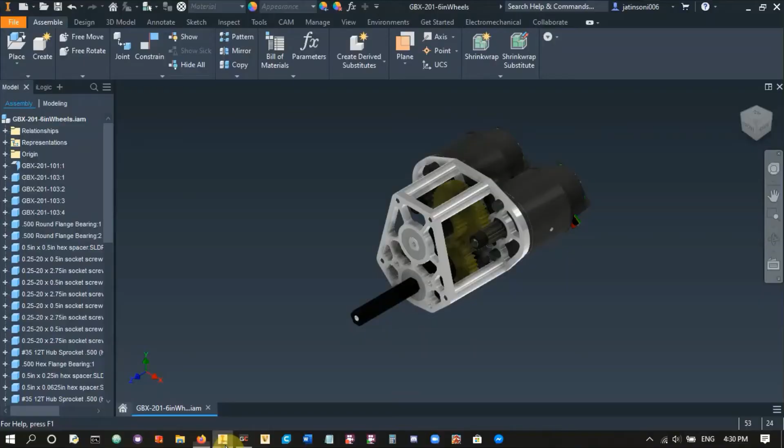Alright, so in this video we'll be starting our drivetrain gearbox. So if you remember in the first video, we covered how gearboxes work, what motors are, what kind of motors there are, how gears work, and how it all comes together into a gearbox, as well as using this JVN calculator over here to configure the gears that you will use, and etc. So today we'll be starting with the gearbox.

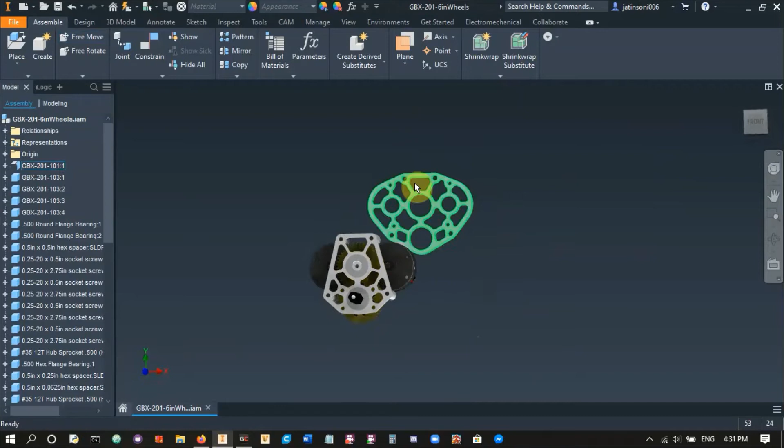And so the first part when you're making a gearbox is making this first plate over here. And so as you can see, where the motors go, where the gears go, all of that is decided by this plate over here. And this is where everything will be attached to. And so this is essentially the first and very most important part of a gearbox. And so that's what we'll be making.

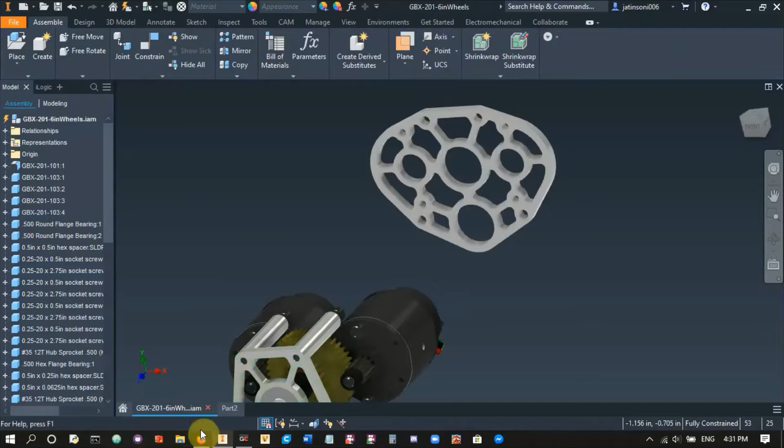So we'll start with the new part. I have a setting which automatically starts a sketch, but for demonstration purposes I'll just start a new sketch. We can start on the XY plane, and so here we are with a new sketch, and we want to create a gearbox. So first step is getting the JVN calculations done, right? So let's say we'll use Falcon 500s, 2 gearboxes in a drivetrain, 2 motors per gearbox, 154 pound weight, and let's say we'll use 4-inch wheels this time, and let's figure out what gears we can use.

Now if you want to know what gears are available, what you can do is hop onto VexPro hex gears, just search that on Google, and you'll see multiple links here. You want to use the 20 dp 1/2 inch hex bore gears. What the 1/2 means is basically the inside of the gears has a 1/2 inch hex cutout, and so we can use a 1/2 inch hex shaft through them.

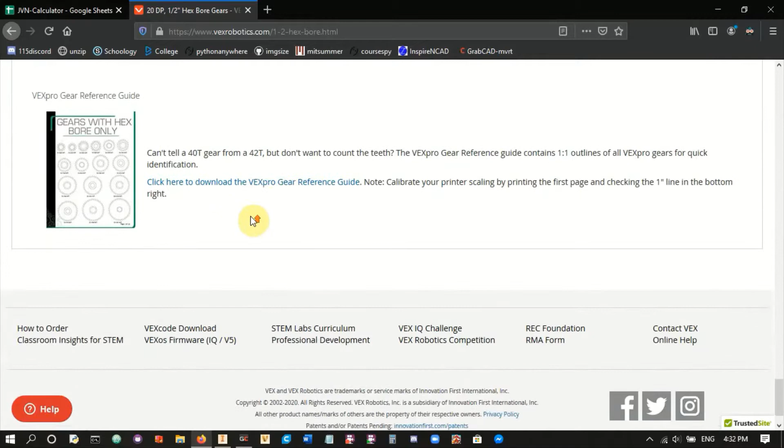And so if you scroll down, you can see all the possible sizes there are. So it starts with 18 and it works in increments of 2, so you have 18, 20, 22, 24, 26, and it keeps on going until you get to 84 teeth, and that's the biggest gear that they sell. And so those are all the possible gears we can use. So that's the gears over here, so 46, 20, 42.

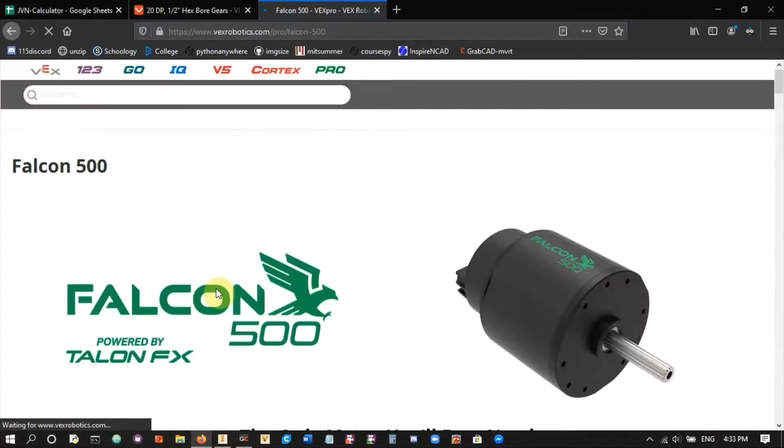Now this gear over here, the small gear that attaches to the motor, those ones are not on this link over here. For that you have to search Falcon 500 motor gears, right? So we'll search that, and if you scroll down to the VexPro link, so this is the Falcon 500 motor page, and we should be able to find the gears here. Scroll down, click on accessories, and here we go, these motor pinions.

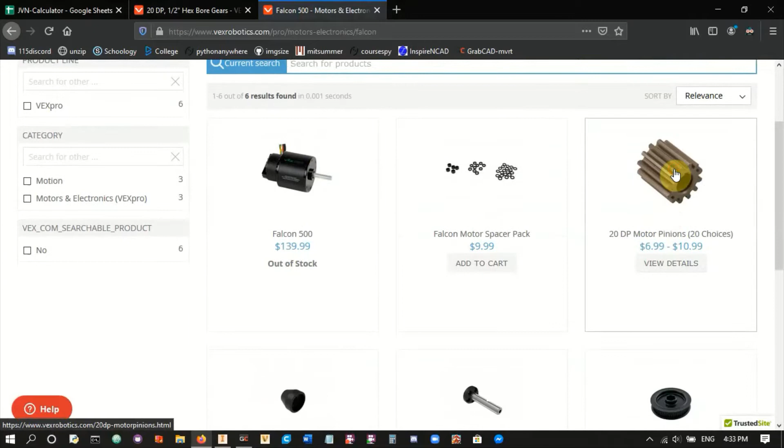So we could have searched for motor pinions, but if you guys see here, it says 20 dp, and over here on these other gears that we use on our hex shafts, it also says 20 dp. So dp stands for diametral pitch, and basically it defines how these teeth are made, and if you have 2 gears that are both the same diametral pitch, they will be able to work together with each other.

And there are also 32 dp gears that are used in FRC, but most commonly you see 20 dp. And the difference there is basically the 20 dp gears tend to be bigger, and so they'll take up a little bit more space, but they also are able to handle a higher load, and that's why you'll see them on drivetrains.

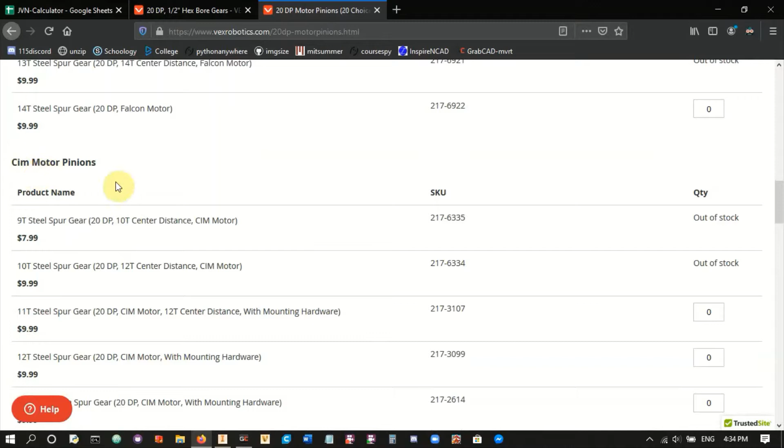So here we go to our motor pinions, and if you scroll down, you can see there's all sorts of options for different motors. So we have 8 teeth gears for the Falcon motor, right? And then we have 9, 10, 11, 12, 13, and 14. And then there's a different set of pinions for the CIM motors, and the CIM gears also work with the NEO motors. So for the CIM motors, you have a smaller list of options, everything from 9 up to 14 teeth.

And then there's pinions for other motors. So for example, the 775 Pro motor, you can also attach pinions to it, but we generally use it with a VersaPlanetary, right? So you have all these gears that can be used. So we can pick here anything from 8 to 14 because we're using the Falcon 500. So let's say we go with 10, so we can change this around.

And then the driven gear, right now we're at 11 feet per second, so that's a little bit slow. And our current draw is 61. So this is a very safe number, but we can go a little bit faster. So maybe let's try 44 teeth. So that looks a little bit better. We have 12 feet per second, and we have 64 amps in current. Let's see if we can go a little bit faster even. So let's try 40 teeth.

So if you reduce these big gears over here, if you reduce their size, you'll get more speed, but less power. If you increase their size, you'll get less speed and more power. The contrary is true over here.

The smaller your driving gear, the more power you'll have. The bigger these are, the higher the speed, but then the lower the power. So you can play around with this when you're deciding your gearbox. Maybe we can try a bigger gear here.

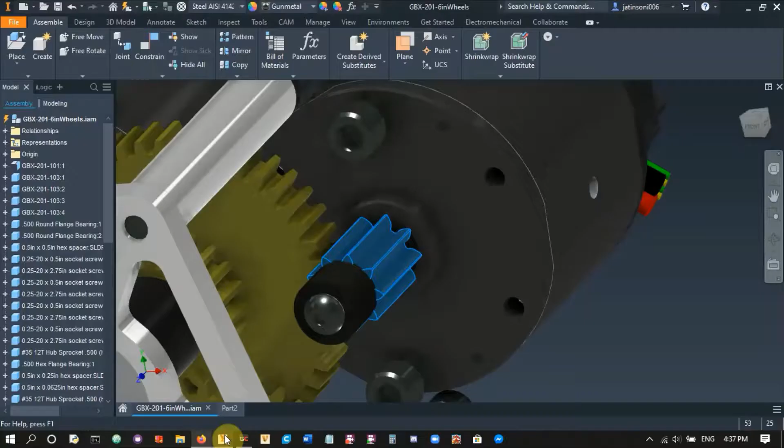So what we can do is just go with these gears here. So we'll use a 9 tooth on the motor, similar to this gearbox, and then we'll have a 44 tooth gear connecting to it, and then a 22, and then a 40. So when we make our sketch here, the first thing we want to do is make these 9 tooth gears. So what we'll do is we'll make 2 circles.

So we'll make a circle here, and we'll make another circle over here. Right, so we have our 2 circles here, and then the next gear in the middle is this 44 tooth. So we'll make a 3rd circle in the middle. That will be the 44 tooth. So these circles here basically represent the gears.

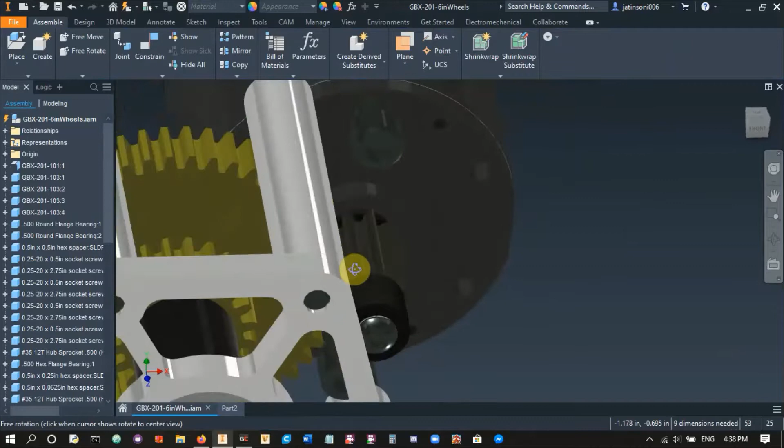Now, what we want to know is how far apart should these circles be from each other so that my gears connect with each other, right? So for that, what we need to get is the pitch diameter of these gears. So if you look closely, these gears mesh with each other, right? As you can see, let me remove this plate here.

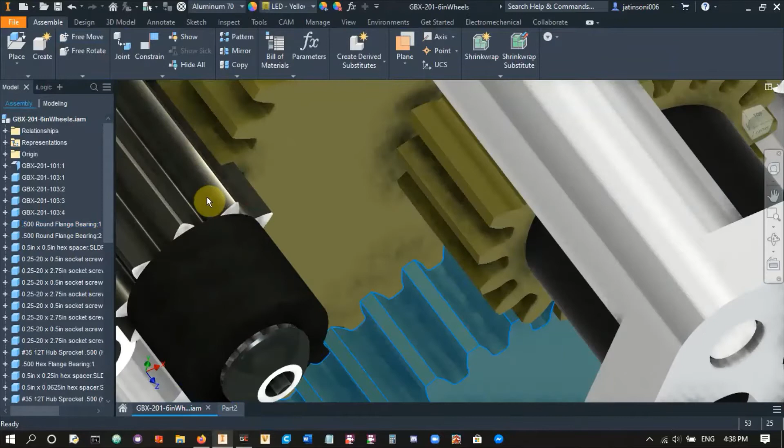If you look carefully, you'll see that the gears actually intertwine with each other, right? The teeth of this gear go a little bit inside of this space over here, and so I can't just use the outside diameter of these gears because then they won't mesh with each other.

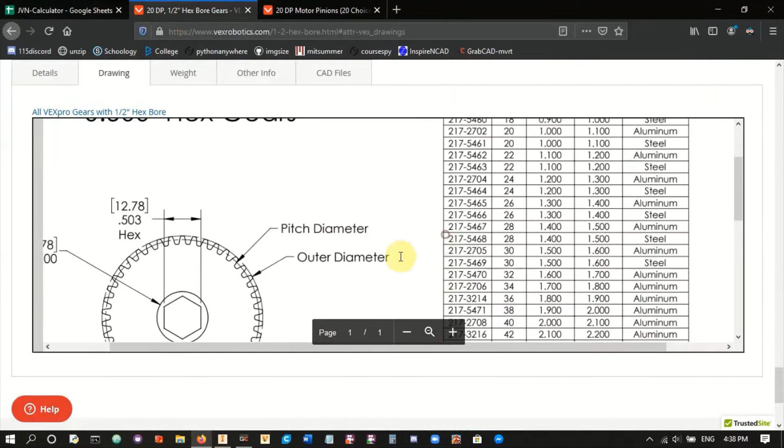So to find the diameter at which they will mesh, what we do is we can head over here and scroll down on this VEX page, and if you click on drawing, you'll see this PDF kind of file here, and if you zoom in over here, you will see that here's the drawing of those gears. So there's the outer diameter of the gear, and there's a pitch diameter.

And so when any 2 gears, if their pitch diameters are touching each other, what it means is that they will mesh with each other. So if I were to make these 2 circles the pitch diameter of my 2 gears, and if I were to connect them, that would mean if I place my gears on them, they will mesh with each other, right?

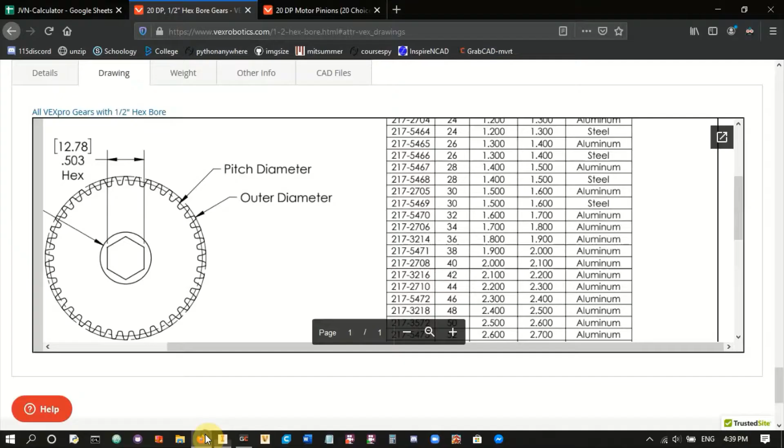So we have a 44 tooth. Yes, we have a 44 tooth here. So if you look here, pitch diameter is this column here. So if we scroll down, 44 tooth, 2.2. So this is in inches. So 2.2 inches is our pitch diameter. So if you go back to our circle, we can add a dimension for 2.2 inches, right?

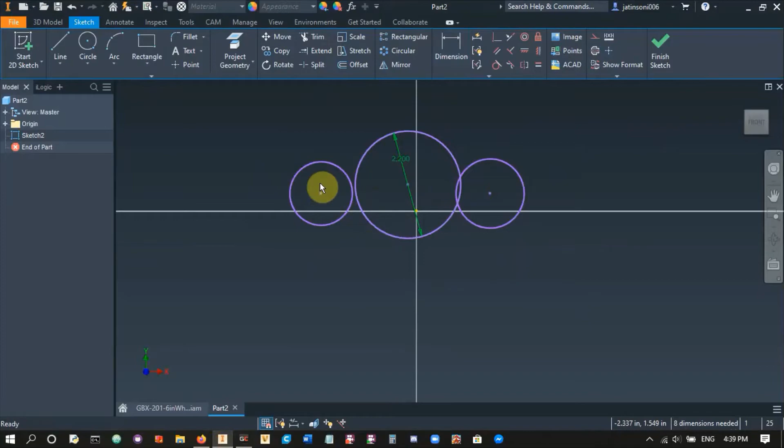And now we want the pitch diameter for this small gear here. So we're using a 9 tooth, and it's a motor pinion, so we have to go on the second website with the motor pinion, and we'll scroll down again, click on drawing, and you can zoom in, and this page is slightly different, but it gives you the tooth count.

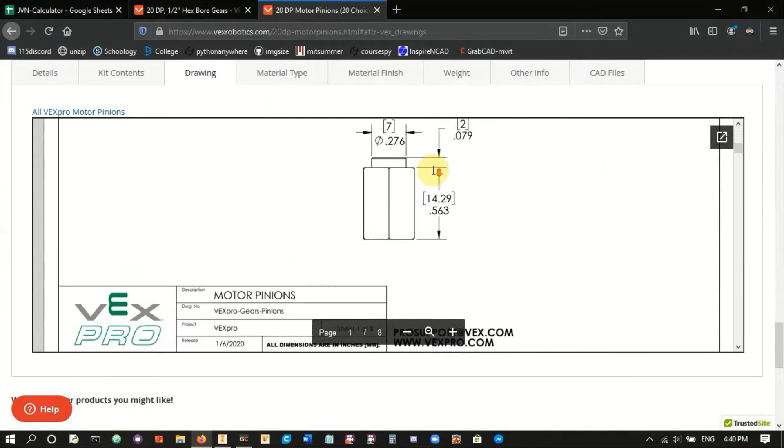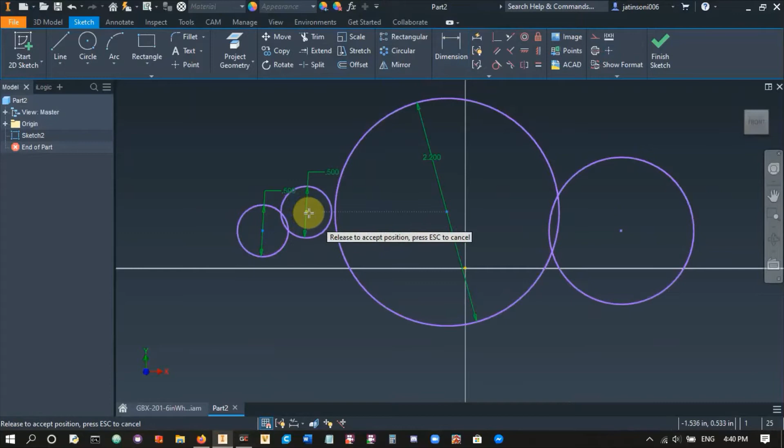So we're using a 9 tooth here, so we have to scroll down, and this is the 9 tooth page, and we're looking for a falcon gear, and so our pitch diameter over here is 0.5 inches. So we'll use that over here. So we'll make this 0.5 inches. And now what this means is if I connect these 2 circles right next to each other, and if I were to place my 2 gears over here, they will mesh with each other perfectly. And that's what we want.

So what I'll do to place them next to each other perfectly is we'll use tangent. What you can do is do tangent on this circle and the second circle, and these two circles are now connected to each other no matter where they go. And this distance between them, if we measure this distance here, 1.35, that's the exact distance we need for these two gears to work with each other. And so that's how you can use the pitch diameters, right?

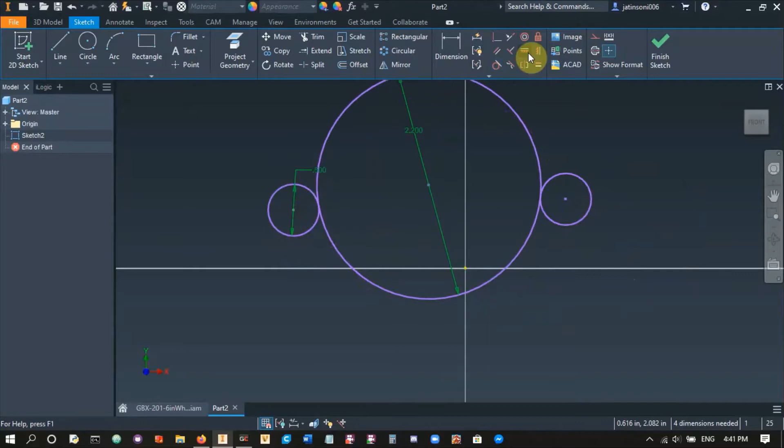And so we have the same thing on this side, so we'll make the smaller circle equal to it, and we also need to make a tangent. So there we go. And then what we can do is have all these gears on the same level, so we can make them horizontally constrained. So the center of this circle should be on the same level as this circle, and the same thing here.

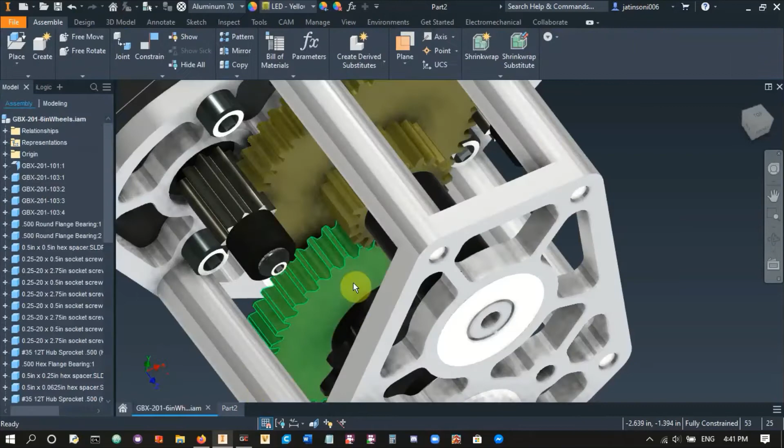And we want this to be symmetric to our origin point. So what we can do is just coincident the middle of this circle to the middle point. And there they are. So now they can't move, it's fully constrained. And so that's my first set of gears. My small gear, big gear over here. Just like how it is in the full CAD over here, right?

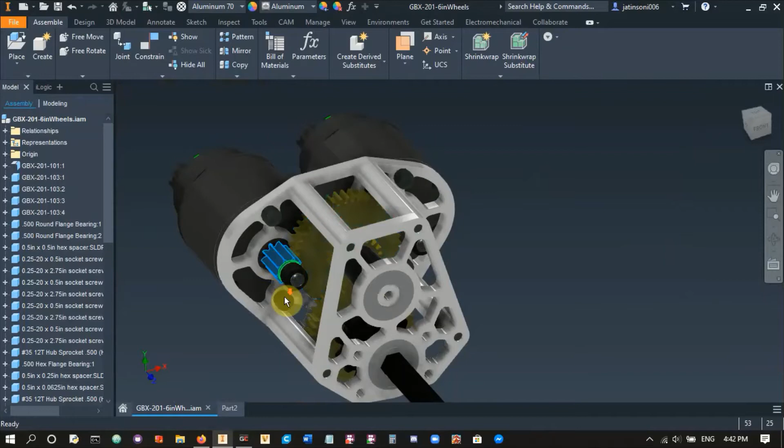Alright, let's move on to our next set of gears. So now we have a 22 tooth gear. Now remember, this 9 tooth gear here is special because it has to go on the motor. The other 3 gears are all of this hex kind, right? Because if you look in our CAD again, these small gears are the only ones that attach to the motor, and the rest of them are on hex shafts.

So now I don't need this motor pinion page and I can close it. And we just need these sizes over here. So we're going for a 22 tooth and a 40 tooth gear. So we go back in our sketch, and we're going to make 2 circles again. So starting from here, this is our small gear, and we'll have a bigger gear over here, right there. And let's give them some sizes.

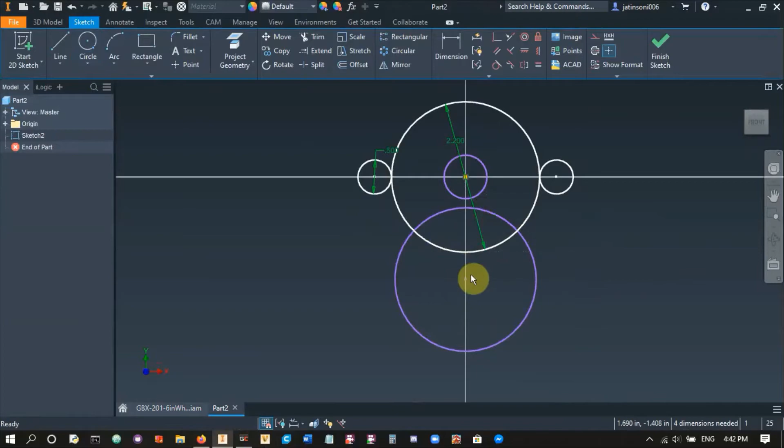So if we go back, we're looking for 22 teeth, and so if we scroll down, 22 teeth, right? And there's 2 of them because there's the aluminum and there's a steel version. Basically, for smaller gears like 18 tooth and anything below that, you want to try to use steel gears because the gears are smaller, they can't take as much load, and aluminum is weaker than steel. So for an 18 tooth, for example, we would generally use steel, but their sizes are the exact same. So we can use the pitch diameter of 1.1.

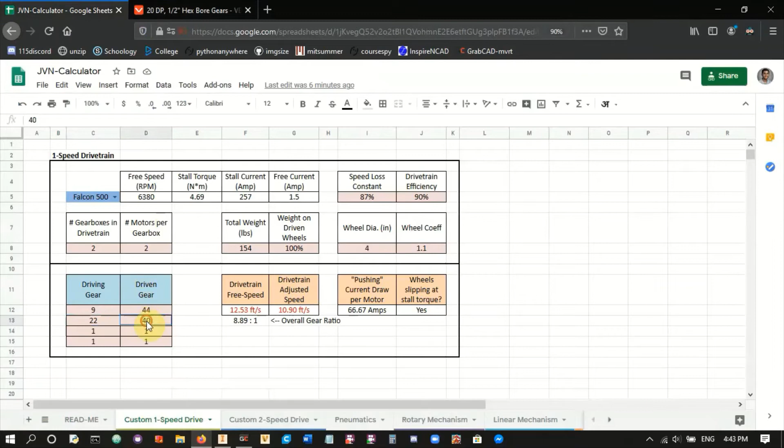So we go here, dimension 1.1 inches, and then let's go back, and our second gear, our final gear here is a 40 tooth gear. So we'll scroll down to 40, and it's 2 inches in pitch diameter. So we'll go back and we'll make this 2 inches. There we go. And so the final step here is to make these 2 tangent, just like we did with the first set of gears. And right now the only problem is this gear can move around side to side. So we'll add a vertical constraint to it so that it remains in our origin point.

And so this right here is a layout of all the gears and how they will mesh with each other, and this will work. And so this is the first part of making a gearbox plate. Now what we can do is make all these construction, and the reason why we need to do that is because even though these are the sizes of the gears, we don't actually need to extrude all these geometries here. What we need to extrude are like bearing holes and things.

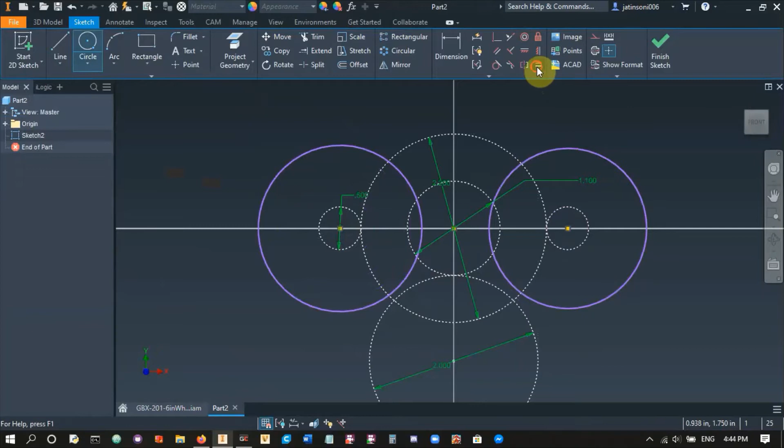So the next part of this sketch would be to model in our motors, because if you look at this first plate over here, it goes around the motors. So we need to know how big our motors are, right? So we'll go in here, we'll make a circle over here and another one over here, and because the 2 motors are the same, we'll make them equal. Right, now we need to know the size.

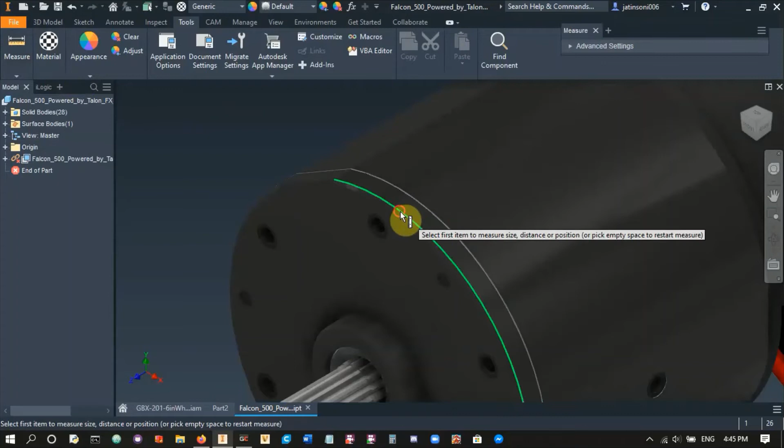So what we can do is go here on our Falcon motor, or you could open it from the parts library. So if you go open, library, motion, motors, Falcon 500. If you open this file, let it open, and if you go under tools, there is a measuring tool. So what we can do is click on measure, and then you can select like this outer circular portion of the motor, and it will tell you, like in this case it tells us the area. If we select just the arc, it will tell us the diameter of the motor. So here it tells us it's about 2.4 inches, right?

So what we can do is we can go in our sketch and we can add a dimension for 2.4 inches. So if you look here, these motors are close to each other. If you look in the assembly, they're also pretty close to each other, right? So this is where making this sketch is really useful, because if my gears were super small, my motors would be colliding with each other, which is not something you want, because that's not possible, right? You can't have these two motors going inside each other.

So this is another place where making this sketch is really useful. Right, so the next thing that we need over here - all these hex shafts need bearings on them, because otherwise how will they spin? So we need to make bearing holes.

So what we'll do is take a circle and make two circles, one here, one over here. We'll make them equal to each other because they're both bearings, and we'll give it a dimension. So bearing holes again are 1.125 inches.

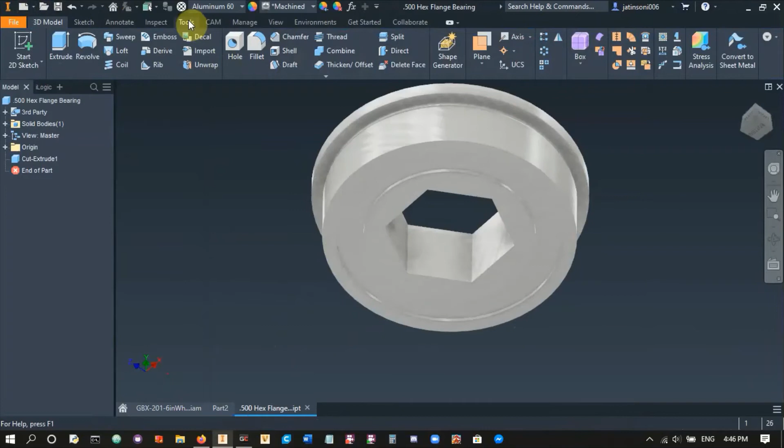And if you want, what you could do is open a bearing file. So we'll go open and head over to bearings, hex bearing, open it, and again we can do tools, measure, and as you can see it's 1.125. It's close enough. So that's the number we'll use for the bearing holes.

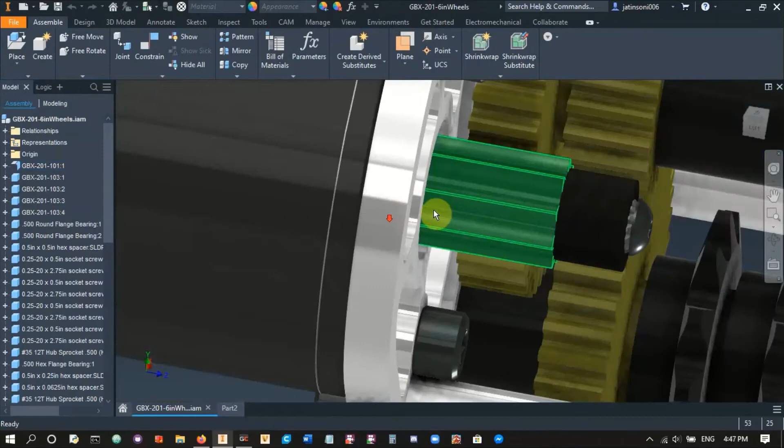Right, so we have that. Now if you look here again on the gearbox, this plate and the gear actually goes a little bit inside the plate, so we need to have some clearance. We want to make sure that this gear doesn't run into our plate over here. And so if we go back here, remember the outer diameter is the outside of the gear. So actually we'll need our motor page again.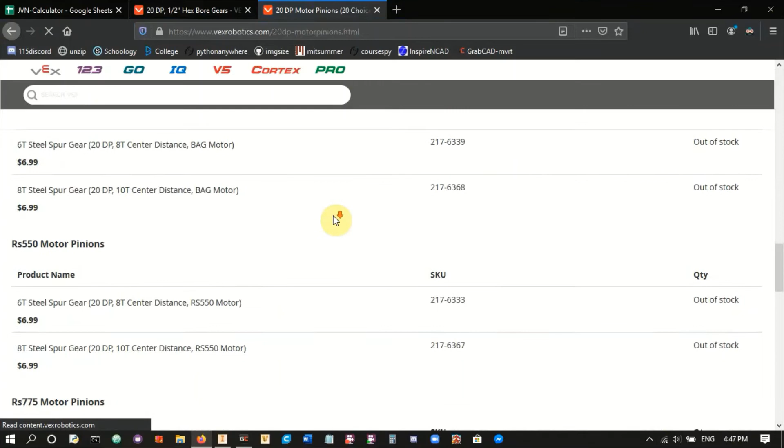So motor, 20 dp motor pinions, there we go. Okay, it says the page is outdated. Motor pinions. There we go, now we're on the right page. We'll go to drawings. And if we scroll down to the 9-tooth gear, as you can see, the outer diameter here is 0.602.

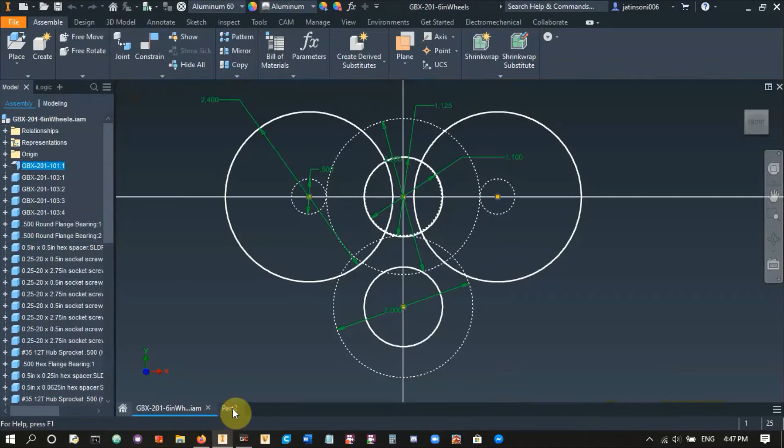So as long as this hole over here is bigger than 0.602, this gear can spin in here freely. So what we usually like to do is just make it a little bit bigger so that we can be rest assured that there won't be any problems - the gear won't jam against the aluminum plate. So what we can do here is make this something like 0.775. And so we have those holes there.

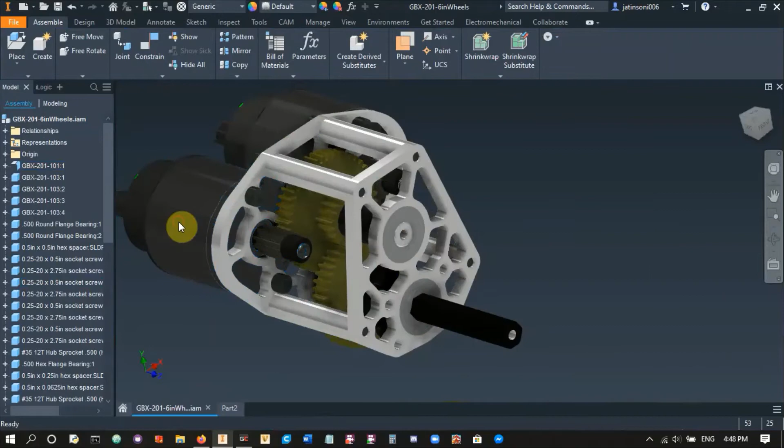And this is starting to look like a gearbox plate, right? So the final component we're missing here, if you look, the motors have holes on them. So if I pull this Falcon out, if you can see, there's all these circles here - these are holes, and the reason for them is so that we can mount the motor, because if I were just to put the motor here, it'll slip out and fall away.

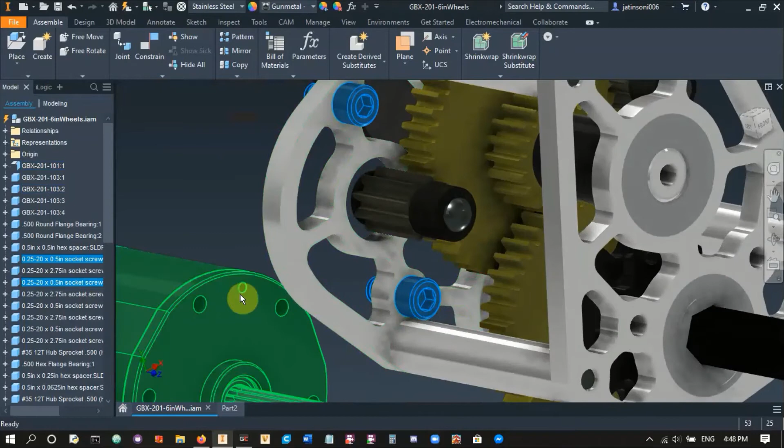And so the way we attach it is using these two screws over here, as you can see. These two screws, they're 10/32 - or why are they quarter 20s? They should be 10/32, not quarter 20s. And these screws attach to the motor. So what we want to do is go back here and add two circles for these screws over here. Now I could add two more circles over here, but I'll show you guys how to use the mirror function in sketches using this. So we'll make these two equal, and equal.

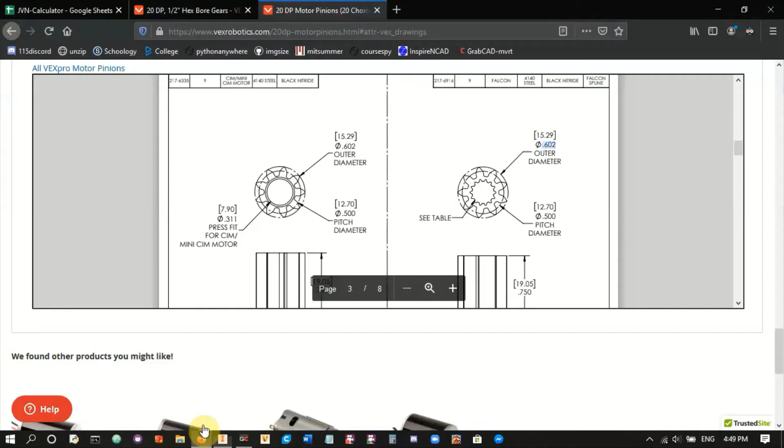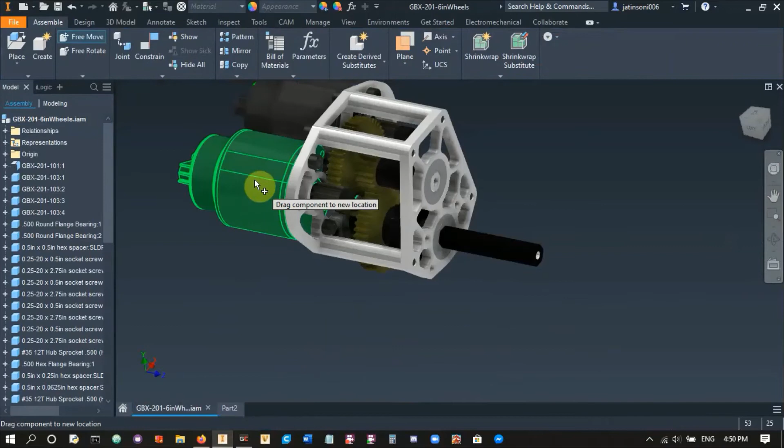So we'll go over here in our sketch, we'll add a dimension for 0.196. There we go. Right, so how far apart are these holes, where are they located? If we again move our motor, and if we measure it, so I'll go into tools, measure, and if you measure these holes, they are 2 inches apart.

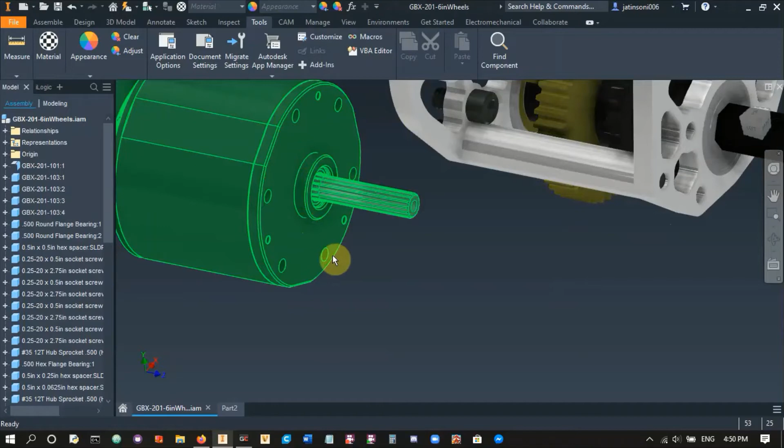Now you could apply screws here and over here, but the problem in applying screws so close to each other is this motor is able to sort of fall backwards. And for the best stability, you want to have screws on the opposite ends. So as you can see here, this screw over here is on the opposite end of that screw relative to the center of the motor.

So we'll do 2 inches. So we'll make these vertical first, and then we want them to be on the center of the motor, and then we'll make them 2 inches apart from each other. Now they're going off the motor, so we have to make them centered. So what we could do here is add another dimension and make this 1 inch over here, because it's 2 divided by 2, so 1 inch. Right, so we want to have these same exact 2 holes on the other side.

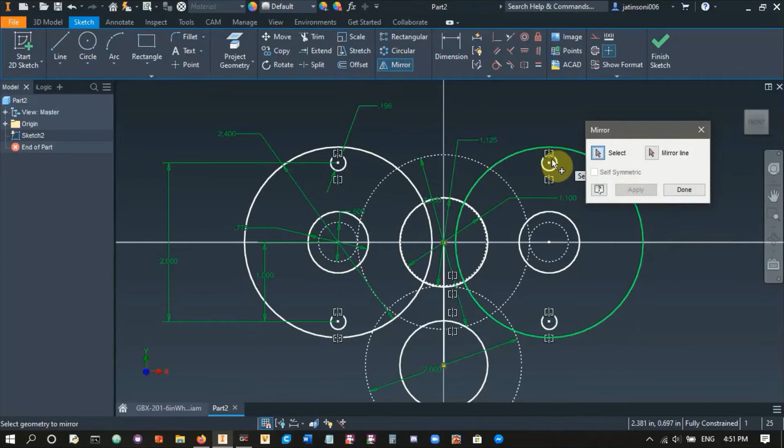How can we just copy it over? What you can do is make a line in the middle like that, then hit mirror, and click these 2 circles, which will be the holes for mounting the motor. Then select the mirror line, this middle line, and hit apply, and now we have those same 2 holes on the other side. Once you're done, you can make this line construction so it's not in your face. So we have our motors, we have our gears.

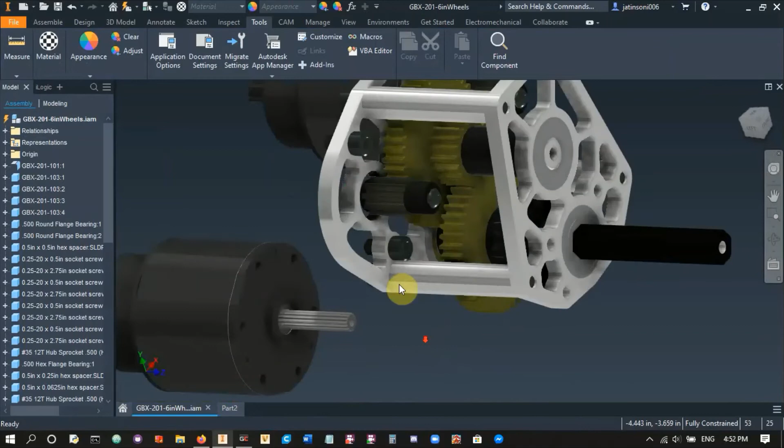What else do we need? So the other thing about gearboxes is there's these motor holes for mounting the motors, and the other set of holes we have is for these screws over here, as you can see. These screws are responsible for holding this whole gearbox together.

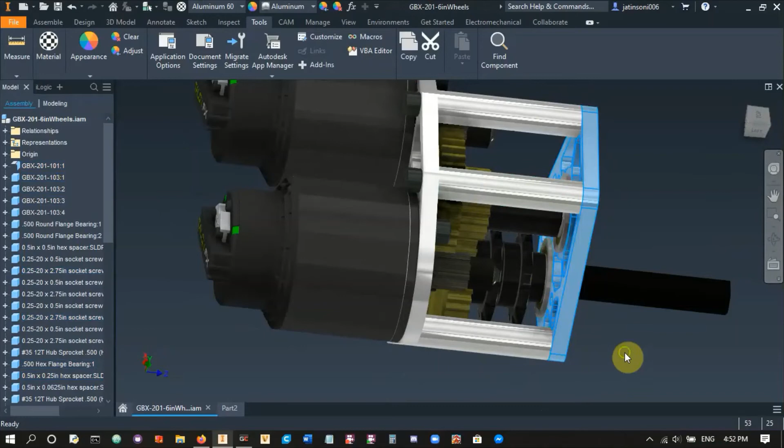So remember, we have this first plate and then a second plate. The job of these 2 plates is to keep everything inside and prevent it from falling outside. We need holes for 4 more screws, because there's 2 on the top and 2 on the bottom. These screws generally we use 1/4-20s because they need to be strong and last for a while, since this is the gearbox, and if there are problems in your gearbox, it's generally a bad thing, because if your robot can't drive, you can't do anything else on the field.

So we're going to go back in here and add 4 new circles, or we could just do 2 and mirror those over. We'll add 2 here arbitrarily and make them equal, and set the dimension for them.

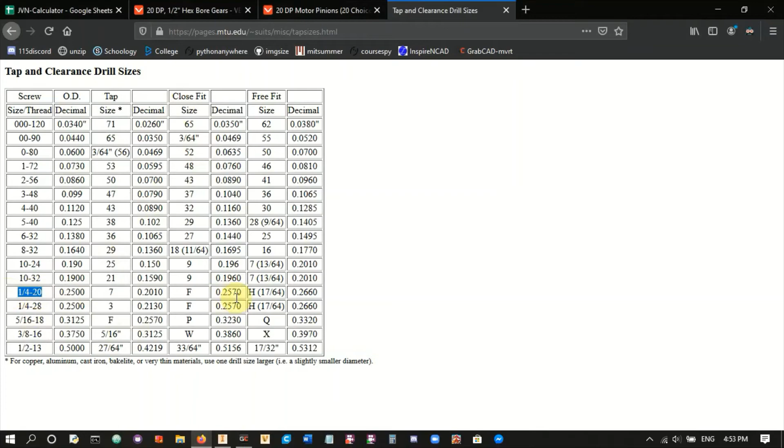So if we go to our tap and drill size chart, again we're using 1/4-20s this time, and we want them to be able to go in and out freely. Because if you look here, they're not screwed into that side, they're screwed into the second plate. So for the second plate we'll have to use the tap dimension, but for the first one they have to go in and out freely, so we use the close fit, which for 1/4-20s is 0.257.

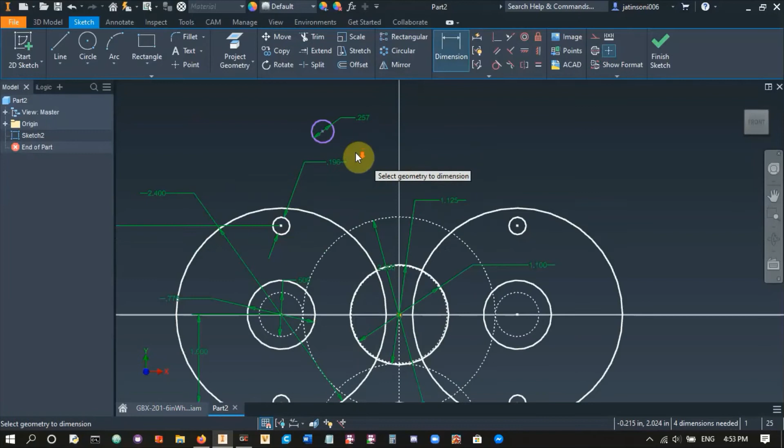So we can go in here and dimension them to be 0.257. There we go. Then we try to figure out where we're going to place them. We could make them vertical, but that would end up taking a lot of space, so instead we'll place them somewhere over here.

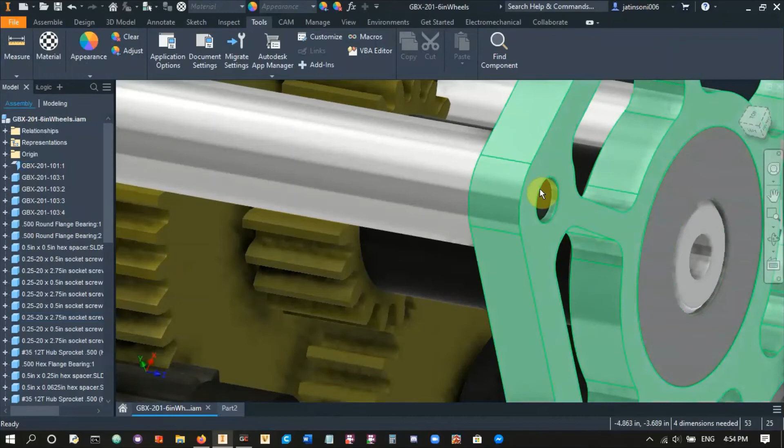Now, another thing to note is if I were to just extrude this dimension for the hole here, I wouldn't have all this extra material around it. And you want extra material so that you can support it. So what we need is a bit of extra material.

The way we can add that in our sketch is we can make another circle on top of our 1/4-20 hole, same here, and make these 2 circles equal to each other. You can give it a dimension of 0.5 inches. So what this means is if I cut out this hole that's 0.257, I'll have guaranteed this extra bit of material over here. That will make sure my part is usable and I can put a screw inside it and not have it just fly off, because you need the extra material.

So I have my screws and I have my extra material there. The reason we don't need to do that for the motor mounting holes is because we already made the circle for the motor, and that provides extra material over here. So where do we place them?

Now we want our gearbox to be as compact as possible, because then it won't take up as much space. So what we could do is make the circle here tangent to the motor, same thing over here. So we're almost done placing these. Now how far in or out do they go?

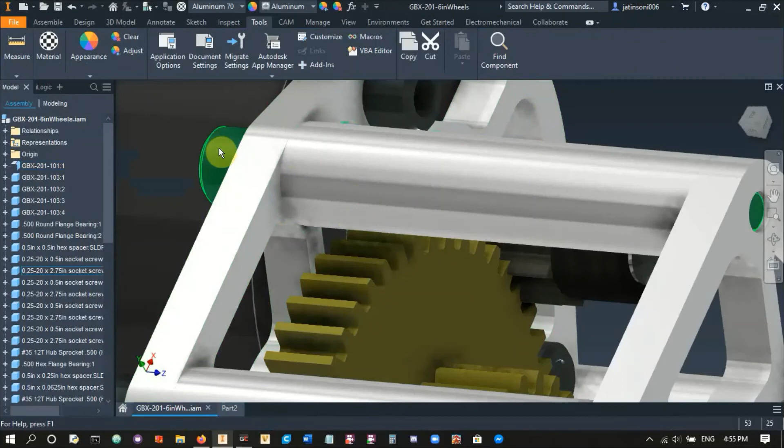So remember, these circles over here are the actual gears, this gear and that gear. And if you look on our gearbox, these screws and the standoff come really close to this gear, but it doesn't collide. So how do we make sure we can get close so it's compact but we don't collide with it?

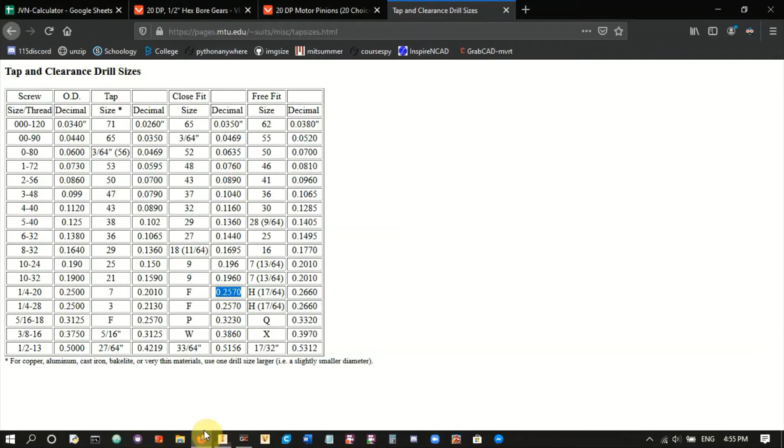Well, remember how we used the outer diameter of this small gear to determine this size? We can do the same thing here. If you go back to our drawings, as you can see, the outer diameter of the gear is how big the gear is. And we're using 44 and 40 gears. So if we look for 40 and 44, their outer diameters are 2.1 and 2.3.

So what we can do here is offset these two circles. Remember, the gears have to mesh with each other, so that's why the pitch diameter is smaller than the actual big diameter of the gear itself. And so we have these two offsets, and what we can do is give them dimensions. So this one was 2.3, and we can make this one 2.1 because that's what it was, right?

So what this means here is this is this bit of overlap here. This is where the teeth of my gear mesh with each other, and this is the very outside of my gear. But obviously, if this is the outside of my gear and my standoffs are touching it, then that doesn't work because that would result in a collision.

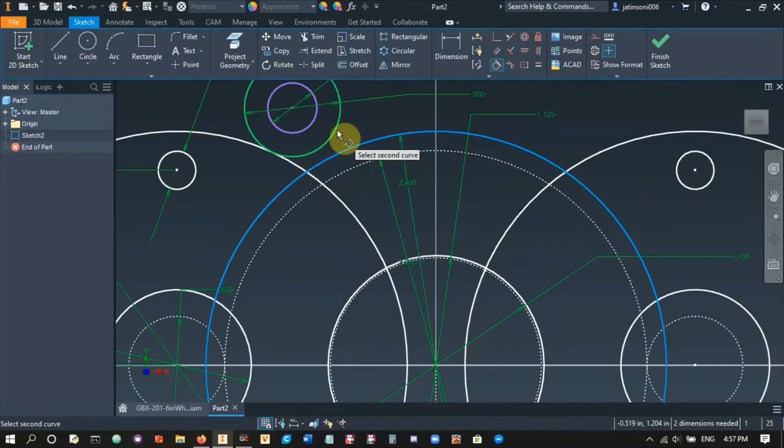So generally what we do is we take this 2.3 and add an extra 0.1 inches to it, so that way we know that if the standoff is touching this 2.4, it won't actually be touching our gear. So that hole is done, and then we want to do the second one. Again, make this bigger by 0.1 inches, and now we can make it tangent to our standoff and our screw. So we have that here.

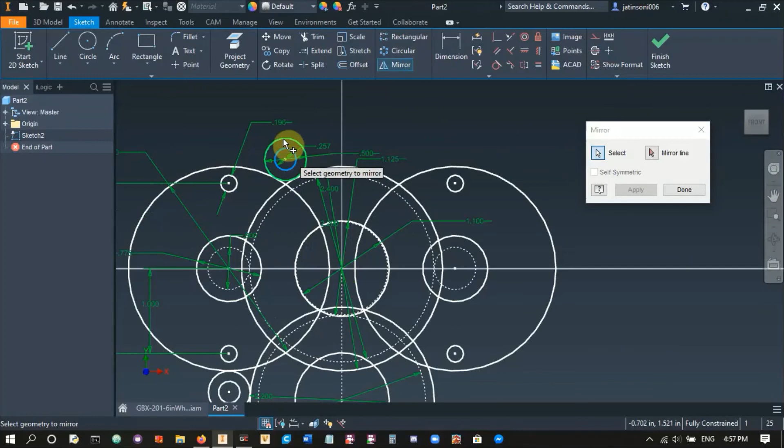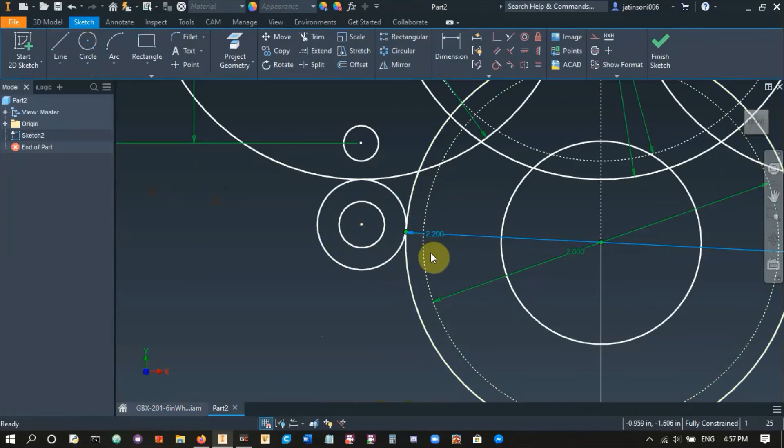Now all we need to do is mirror over our screw hole and the extra space around it using this middle line, hit apply, and there's our second set of screw holes. Now this 0.5 inch diameter circle here, that's also the diameter of the standoffs, so that's why I'm making them tangent, and I can be rest assured that I won't actually hit the gears because this 2.2 is bigger than my actual gear.

So now this is starting to look like a gearbox. The final step here is to connect all these circles here with lines so that we have an outer shape. So what we do is we hit line and we can connect these two circles. We can come down here, connect these two, and we can connect these two over here.

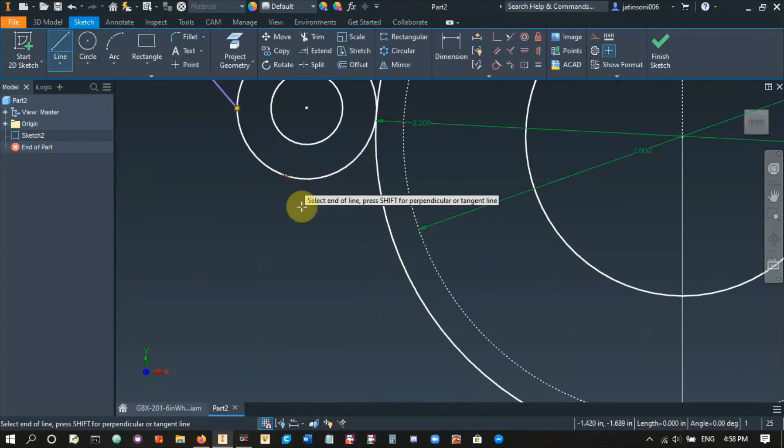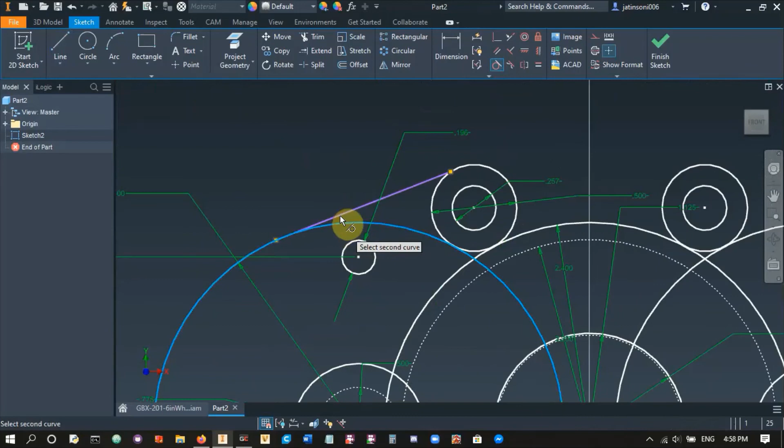As you can see, those connections don't look very good right now. So what you want to do is do tangent and make these lines tangent to the circles so that you have a very smooth flowing shape for your gearbox plate. So we'll do that, and we'll do the same thing here on the top.

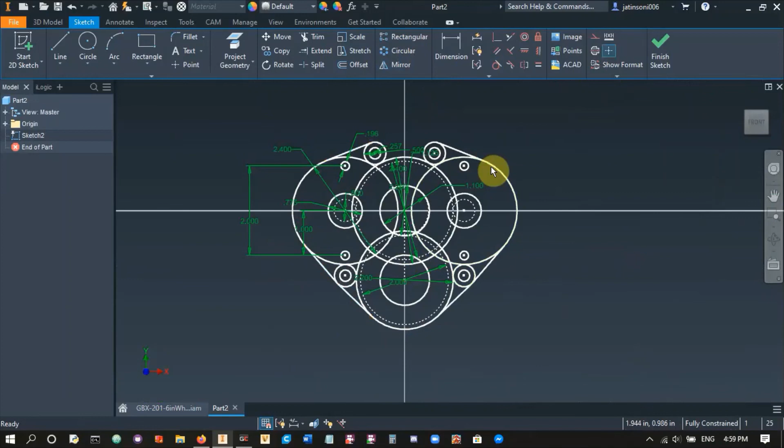And what we can do is we can mirror all these lines over. So once you make one side, you just do the other side. Hit that line and hit this line, mirror over our central line, hit apply, and there are the other set of lines. We're only missing this one set on top, so we can just do another line in between those two circles, make it tangent, and there's our gearbox shape.

So what do we do now? Well, we can extrude it. So we can finish the sketch. Now you could save this as a separate layout sketch if you wanted to, but I generally make it and just extrude it. And so what we can do is make it symmetric, and for the thickness of this plate...

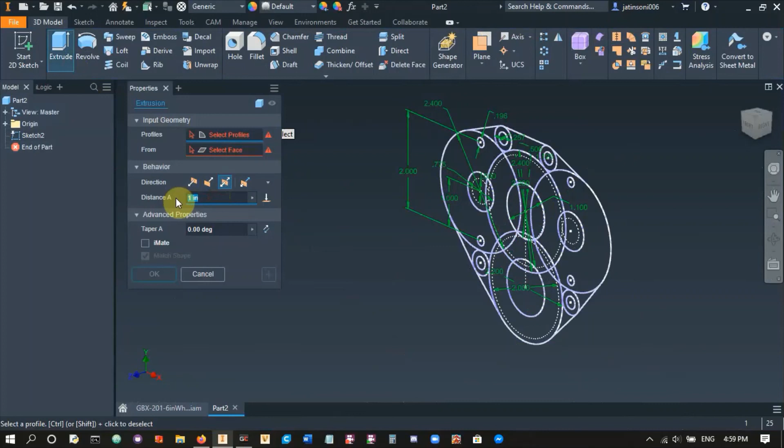We generally use 1/4 inch aluminum because it's super strong and super reliable. It is heavy, which is why you don't see it everywhere on the robot, but because this is a drivetrain and we need it to be really strong, we can use 1/4 inch aluminum.

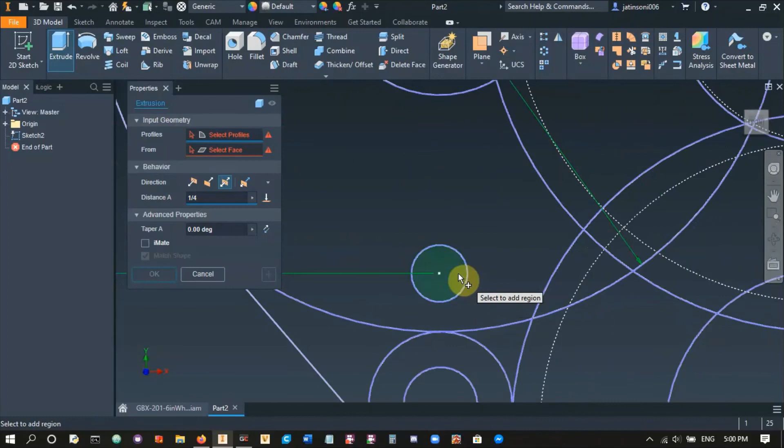So now what do we select here? Because we have a lot of things to select. Remember that these circles here are holes for screws, so we don't want to select them, but we want to select everything that's around them. So we'll just select these things here.

And again, this is a hole for the standoff screws, so we'll leave that one out and we'll select everything else around it. And so we can just do that as we go around. Remember, these big holes here are for the bearings, so we want to leave those as well, but we can select everything that's around them.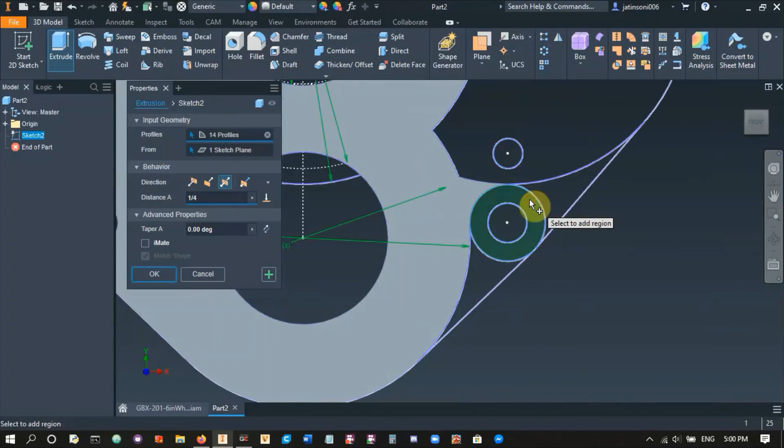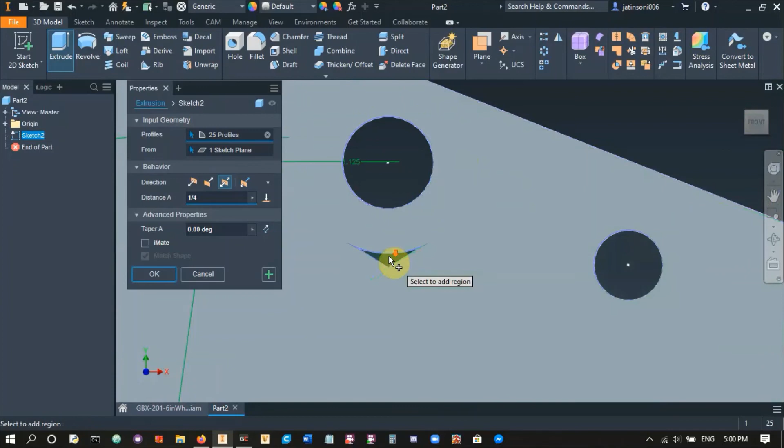So you just work your way around, selecting everything that's not supposed to be a hole for something, and we're starting to get our shape here. You might have these tiny zones that you have to select, but you can just zoom in and select them. Select that, select this, and we are almost done selecting. There we go, there's our whole plate.

We can hit OK, and as you can see, that's our first gearbox plate. We can attach our motors and screws and everything to it in an assembly, and we can make a whole gearbox. Thanks for watching.

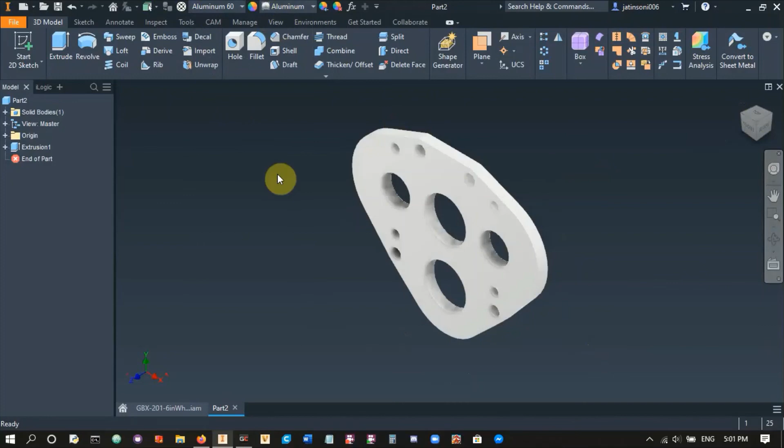And we have to set up materials here as well, so don't forget about that. So we'll go back to aluminum 6061. I'll change the colors, and we'll save this as our gearbox.